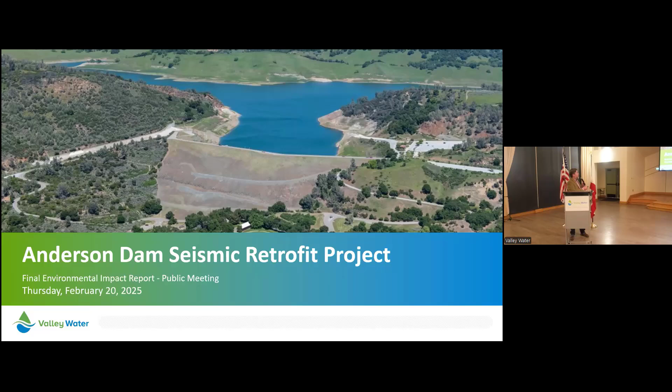So just looking at the dam here, this is an older photo, and as I jump to the next slide, you can kind of see some changes with that view here. So you can see the work that's gone on the upper parking lot, and then down below the tunnel portal. So just to kind of see some of the progress we've made with the Anderson Dam Tunnel project.

But anyway, I'll share the agenda here that we're going to talk about this evening in the presentation. We'll talk about the project schedule, the project background, we'll give an update on the tunnel project. And then we'll do a project overview, and then Wendy will give an overview of the environmental impact report process and the next steps.

Okay, so this slide, we've shared this before, but I think it's helpful to kind of bring some clarity to the different acronyms and the different things that are going on related to Anderson, as well as the major Anderson Dam Seismic Retrofit project itself. So on the right over here, you see the FOCP. This is the Federal Energy Regulatory Commission FERC Order Compliance Project. So we call this the FOCP. And actually today is the 5-year anniversary from when we received the directive, February 20th, 2020, to drain Anderson Reservoir for safety reasons.

Down from our previous restriction, which is around 60% that was mandated by the state. But FERC ordered us to drain that reservoir down to dead pool. So essentially we have no water in the reservoir, although it still holds some, but we can't actively use any of that water supply anymore.

So along with that project and not having that availability of water supply, there's a lot of different components came out of that order. So first we have the Coyote Creek Flood Management Measures project. So this is related to the tunnel project. When we open up the diversion flows, we have to have a way to convey those increased flows in a constricted area of Coyote Creek in San Jose. So this is really important to get that project underway. So that was one component that got started, and that project is wrapping up. So we actually had a press event this morning out there at the Coyote Creek in San Jose.

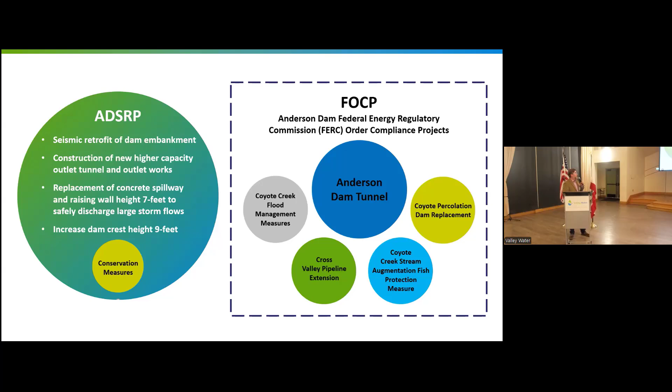And then we have these conservation measures that we'll talk about a little bit more tonight, but those are part of the ADSRP, and there's some additional projects such as Ogier Ponds and the phase 2 at the Coyote Percolation Dam that we're incorporating into the Anderson Dam Seismic Retrofit project.

All right, so I think I covered a lot about these projects already, but up top you see our schedule on the Anderson Dam Seismic Retrofit work here. So the design started way back in 2013. We've been working on environmental review and permitting all along. Then, of course, in 2020 is when we had that major shift in our work.

When we had that FERC order come in 5 years ago and really broke out all these projects down below, the FERC order compliance project. And that's when we really had to kick off and pull the Anderson Dam tunnel component out of the retrofit project and make it its own project, which came with a lot of challenges, and then also build these other measures so that we could complete the tunnel project and use it to start the retrofit.

So moving through here, we've started our procurement process. We've started advertising to contractors for pre-qualifications, and we actually just did receive pre-qualification applications for construction contractors for the retrofit project. And then we're planning to give the notice to proceed to such contractor in mid-2026, and then hit the ground running and breaking ground in early 2027 and working through the construction phase you see here.

Okay, so just some graphics to highlight what I've already discussed, the different components of the retrofit project. So right here in the center, this gold blob you see here is the embankment dam itself. And so we will be taking that down and replacing it.

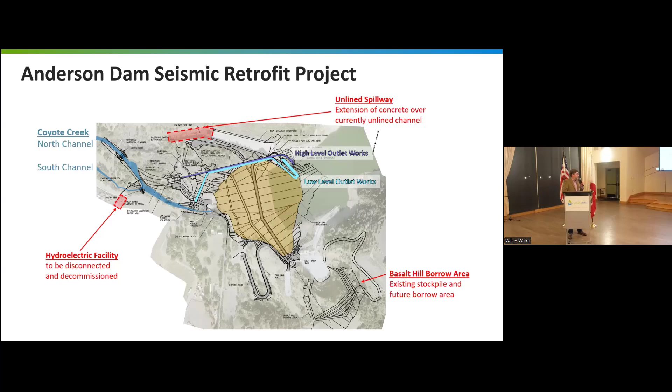Okay, so this image goes through the sequence of the embankment reconstruction, and it's really hard to read all the text here for you all, even in this slide, but I think we're going to blow this up onto one of those nice boards for future meetings so people can really get in close and read through all this. But just walking through quickly, I think we've shared this in other fashions before.

The reason this project takes 6+ years to complete is because there's only so much work we can do in a single year, because we can't work during the winter. So we have to divert all the rain flows that come in each winter while we have an interim dam, is what we call it, in place.

So the first year of the dam construction, which is actually year 2 of the construction project, we'll come in and take off about the top third of the dam and store that in one of the material handling and stockpile areas. And then we'll sit through the winter and divert the flows through the tunnel while they come in.

And then we'll come pick that up in the spring of the next year and take in the upstream and downstream slopes, about another third of the volume of the embankment itself. And then same thing, divert those flows during the winter.

And then in year 4, we'll come in and take down the rest of the material we'll be removing, leaving this remnant core. This is like a clay section that's in the center of the dam. And then also bringing back in new material and building our first part of the new dam.

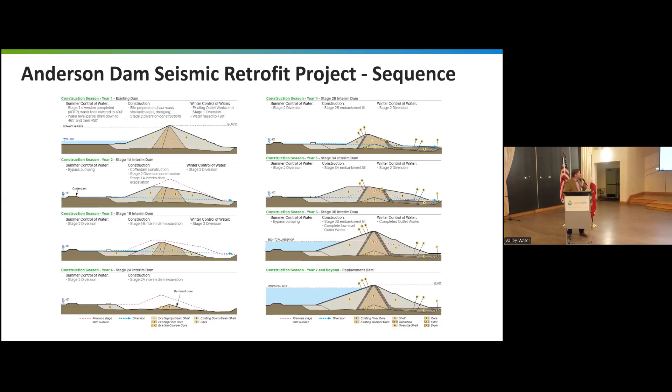Okay, so a quick update on the Anderson Dam Tunnel project that's been in construction for almost 4 years now. This kind of just goes through the different components, and the slide is a little light, but this is where the reservoir sits here.

And the first piece that we've completed is the intake and trash rack foundation, so that's this little square here. We'll see some photos of that, and that connects to the microtunnel boring machine lake tap, this small blue section that's also been completed. So we've got an 8-foot diameter steel pipe running out of the reservoir, and that was done with a microtunnel boring machine that started within the tunnel and drove out about 350 feet.

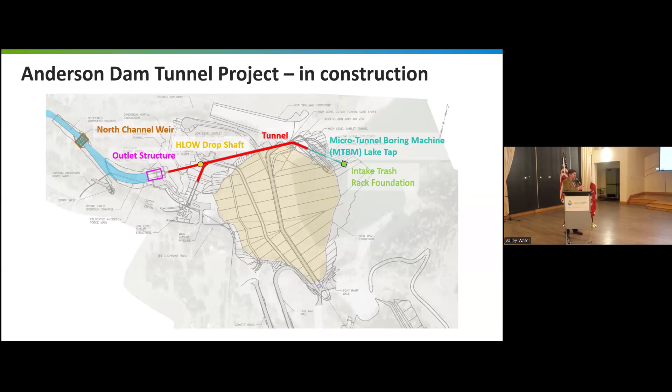So we'll see some photos of these elements here.

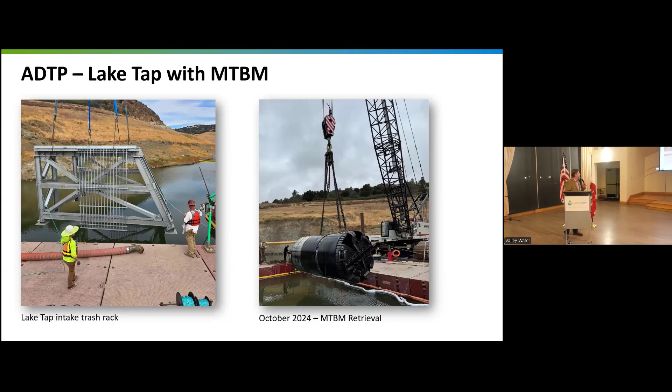In January, they started working on the waterproofing. There's a waterproofing membrane that goes in between this excavated support and the structural lining. Now they're working on putting the reinforcement for the 2-foot thick lining and then the rebar that goes along with that. It's a major component of this project.

There's a really novel idea being used here to protect the tunnel in the case of a seismic offset. If there was a seismic event that shifted the ground and impacted the tunnel, there's what we call articulated tunnel segments.

So these 5 or 10 foot long sections are disconnected along the length of the tunnel, and they can move like sliced bread if the ground moves around it. So it's a really good way to protect the tunnel for seismic resiliency. We're working on that now.

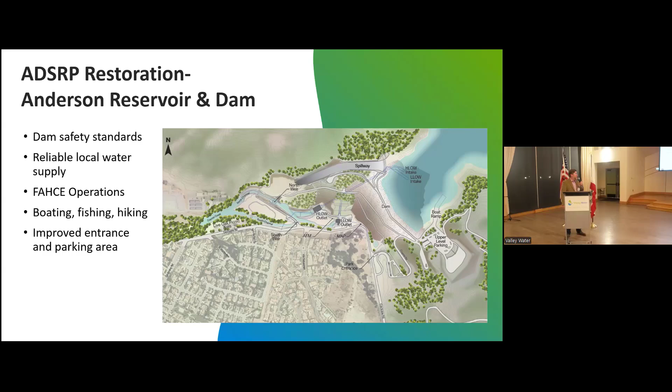Okay, I'm going to pass the mic over to Wendy. She'll go through the environmental impact report.

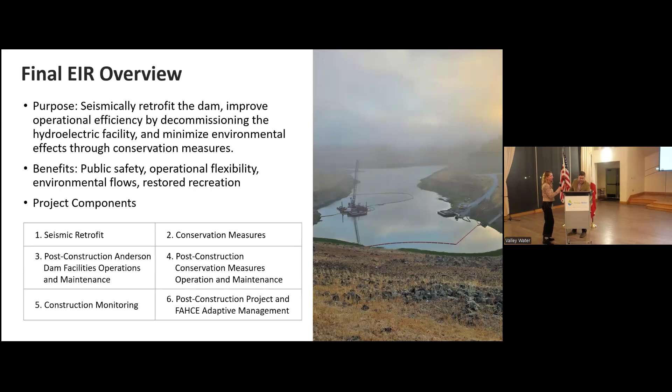Hi, I'm Wendy Young, Environmental Services Manager for the Dam Safety Division. I'm going to provide an overview of what our final EIR includes and how it differentiates from our draft EIR.

The overall purpose of the project didn't change. It's to seismically retrofit the dam and improve operational efficiency by decommissioning the hydroelectric facility, and minimizing environmental impact effects through the project by implementing conservation measures. The overall benefits of the project haven't changed either: to increase public safety, provide operational flexibility, and incorporate FAHCE flows, which allow us to both operate the dam so we continue to provide sustainable drinking water and provide fish habitat downstream through Coyote Creek.

And we're going to restore recreation, as Ryan mentioned. The 6 project components included in the final EIR are the same as the draft EIR. Ryan went over the seismic retrofit component, which is the biggest, taking the dam up and down. The second is the conservation measures, which I'll go over in more detail on the next slide. We have a location map that shows where those are.

The conservation measures include Ogier Ponds, which is restoring about 6 miles of Coyote Creek downstream of the dam. It's a second phase of the Coyote Percolation Dam project that increases the ability for fish to pass through that facility. There's a sediment augmentation program where we introduce gravels into Coyote Creek to enhance habitat for fish downstream. And then there's ongoing maintenance of 2 parts of FOCP, which Ryan was mentioning—those are the projects that FERC had us start in 2020: reconnecting the North Channel just downstream of the dam, and a steelhead restoration project happening in the South Channel of Coyote Creek, right downstream of the dam as well.

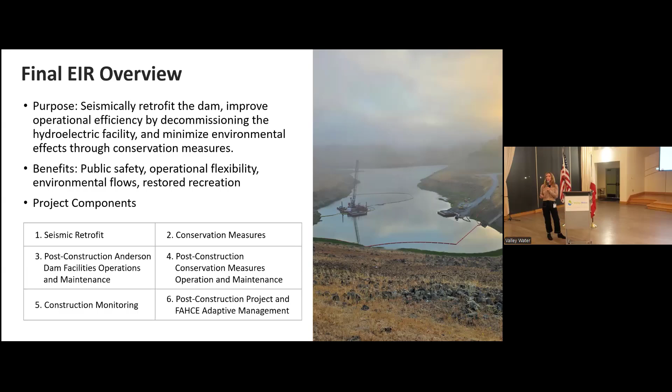So what that looks like is actually following the entire project, including installation of the conservation measures after the dam seismic retrofit. We'll be continuing to monitor the project over time, and if there's components of the project that aren't working exactly how we thought, having different outcomes, you might make updates to the project or to different parts of the conservation measures downstream so that we're getting the overall benefits of the project that we initially intended.

The conservation measures include the maintenance of the live oak restoration reach - that's the south channel of Coyote Creek, right downstream of the dam that I was talking about. And then there's maintenance of the north channel reach, which is where Ryan was talking about the big outlet structure that's going to come from the tunnel.

Both of those will be monitored throughout the construction of the dam to make sure they're continuing to provide adequate flow capacity, and that the steelhead habitat being restored in the live oak restoration reach is maintained as we're doing construction activities.

Further downstream, we have the Ogier Ponds conservation measure, which is going to restore about 6 miles of Coyote Creek for steelhead habitat. In 1997, Coyote Creek jumped out of its historic alignment and went into mining ponds, so we're going to pull the creek back out of those mining ponds. There's a lot of invasive species, temperature issues, and fish passage issues there.

Restoring that habitat provides 6 miles of restored habitat for fish, but also other species, because it will include an enhanced riparian corridor.

And then further downstream, we have phase two, Coyote Percolation Dam. In phase one, like Ryan was saying, as part of FOCP we installed a bladder dam, which allows us to control flows easier through that facility and improves fish passage.

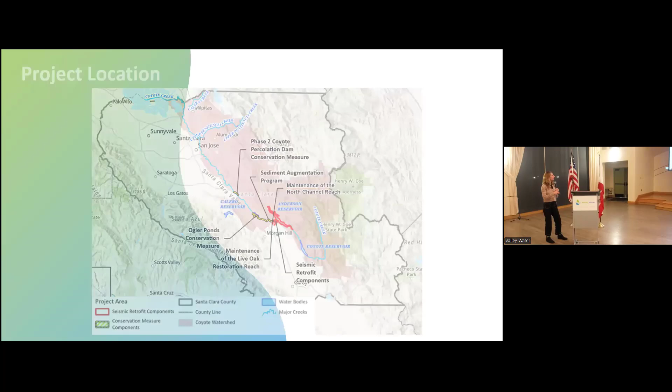As those interim risk reduction measures have been implemented, we've been updating the designs for the seismic retrofit project. We released the draft EIR in September 2023 for a 60-day public review. In August 2024, we released a partially recirculated draft EIR for public review for 45 days. The reason we did that is because we had to make changes to the project in order for the actual construction of the project to be feasible.

There were changes to aesthetics, air quality, greenhouse gas, and noise. We actually had to increase the number of truck trips and extend construction hours so that it was feasible to get enough of the project done in each season, to provide a stable, safe environment that we can close down during the winter each season and continue to stay on schedule for the project.

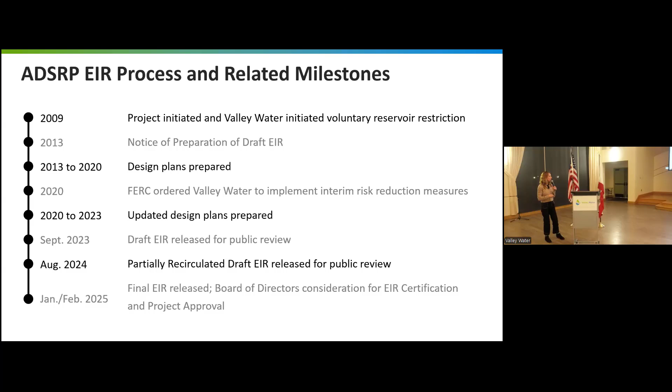Within the final EIR, the purpose is to include any project changes that have been updated between the draft and the final. There are little modifications, it's a large, complex project. So there have been little changes in the project that are included in the project description, and also within certain analyses, depending on which resource topics those impact.

So within the contents of the final EIR, the changes to the project are just changes that came up as we moved through the design process. And they're also in response to comments that we've gotten from agencies and from the public.

So the way the final EIR is formatted, it has underlines and strikethroughs. The same text that is in the draft EIR is in the final EIR, and you're able to see how everything has changed, because the underline is all the additional text that's been added, and all the strikethrough is everything that's been taken out. That way it's easy to see how things have changed moving through the document.

The contents of the final EIR include our responses to public and agency comments, changes since we released the draft EIR, and updated impact analyses depending on if resource topics were affected by those changes made to the draft EIR.

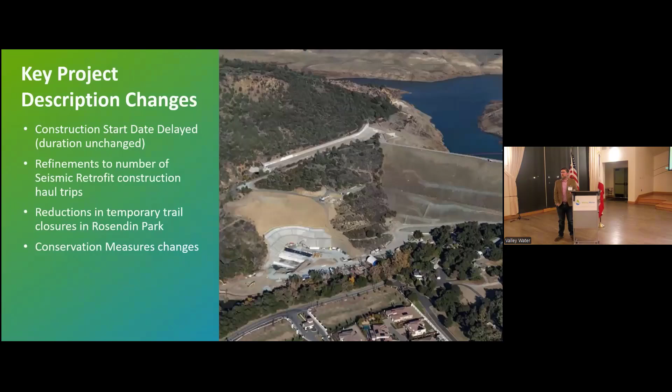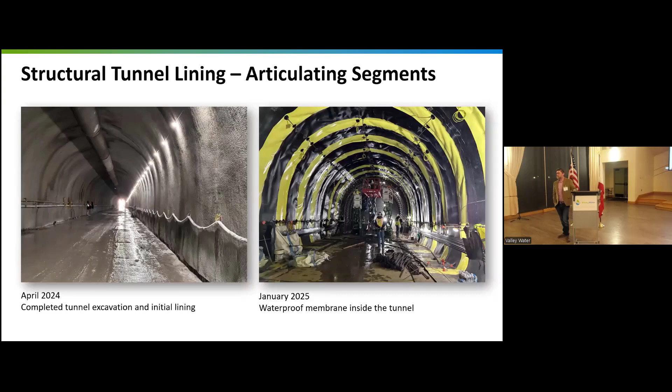First of all, great presentation, really appreciate it, I thought it was well done. Two points I'd like to make. My understanding of reading the EIR, which is over 2,000 pages so it's not an easy read, first question is on the stockpile areas. You've got a ton of them right in front of the Holiday Lakes homes, and you've mentioned increased haul trips. My understanding of reading the EIR is you're going to be running trucks 24/7 for good chunks of the year, for like 6 years, 24/7 in front of our homes all night long. Those trucks are not quiet, they have backup horns. What are you doing about that? I know this was a question submitted, and the proposal at that time was at night, maybe use the stockpiles on the north end of the lake versus the south end in front of the homes. But I did not see that addressed in the revised EIR. Can you tell me what your plan is?

Yeah, that's giving some pretty detailed specifics on the contents of the environmental impact report. Basically the intention of the EIR is to lay out all the potential impacts. It likely won't be for 6 years, it likely won't be 24/7, right? So we'll do our best to limit the impacts, but we have to create an upper bookend of those impacts in the report so that we can then mitigate them as best as possible, if that makes sense. It does. It doesn't really answer it, but understood.

The second item I'd like to address is on the wildfire side. My understanding from the EIR is that it basically states this project isn't really increasing our risk of wildfire, but you are looking at potential things you can do about it, kind of saying there's no change. However, if we've learned anything from Pacific Palisades, empty lakes are not conducive to putting out fires, and we're going to have an empty lake for a very long time. Up in that neighborhood along the lake, Holiday Lakes, it's a high-risk fire area. If a fire starts in there, good luck stopping it. Now with the lake there, helicopters come in, get water, and put it out, so we've always had that. Because of this project, we are not going to have that. So it does increase our fire risk, not the chance of a fire occurring, but greatly increasing the likelihood of not being able to put it out quickly or effectively without the lake.

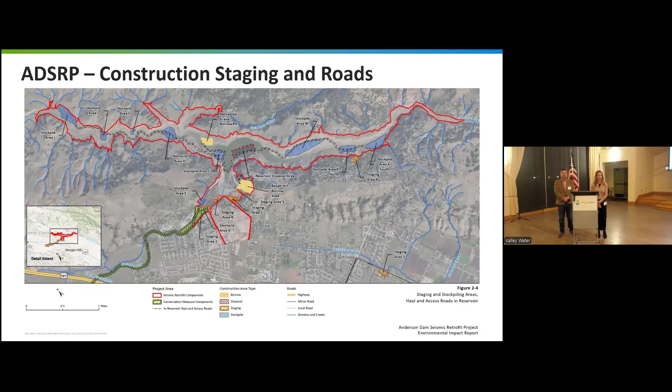We have lots of problems with the cell phone infrastructure up there. It goes down — it was down last week. When we had the public safety power shutdowns in 2019, we lost everything. So no internet, no cell phone, no way of communicating.

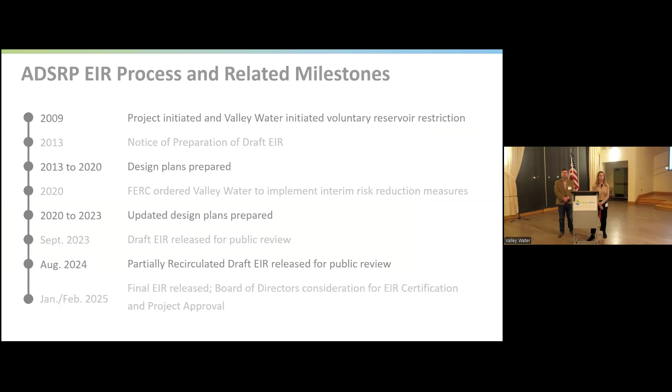You're not going to drive a lot of cars around a network of about 30 miles of road and reach people in time just to tell them to evacuate. So there needs to be another mechanism. What Marin County does is they distribute NOAA weather radios that can go off at 3 o'clock in the morning. They're not dependent upon the electrical grid, it's just a different communication channel for getting the signal out. And then AM radios broadcast through the emergency evacuation area up through Henry Coe, so people have real-time information about how the evacuation is proceeding. If you read the letter from Whitegood, that evacuation can take over 6 hours. I think these are reasonable mitigation measures.

They're all well justified. In fact, these aren't the opinion of Sean Mulligan, they're all expert assessments on what needs to be done. So that's what we're looking for in the wildfire mitigation measures.

And then wild pigs is a more complicated one. I know Wendy said a number of things which are true, they can swim across the lake. They're not quite as bad as the little animals in Jurassic Park, but they're bad. We may be successful with the program that you're undertaking, we may not, in which case this may just become the new normal if we're not successful.

We'd like to definitely have more input on how that 5-year program is structured. And obviously we'd like to have a signal from you tomorrow, ideally, on how Valley Water intends to proceed. You obviously have our 23-page lawyer letter you're evaluating, so we will make comments at the Tuesday meeting as well, and I guess our attorney will too. Thanks.